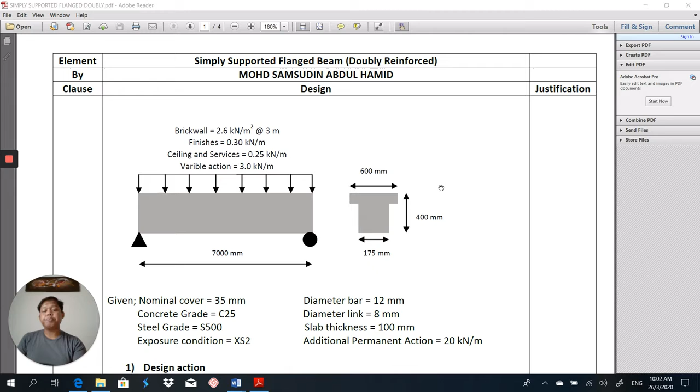So in this case, the nominal cover given here is 35 millimeter, as I said usually. The nominal cover should be calculated based on three conditions: the first one is due to fire resistance, second one due to exposure class, and then the third one due to bond requirement.

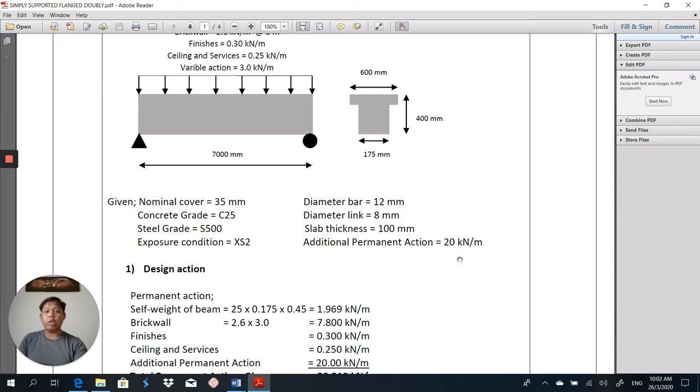So here are the given data that I'm going to use in order for me to design the beam. There is an additional permanent action here, 20 kilonewton per meter, on top of this beam, so you must not forget about this. Maybe this load is due to some external structure that is applied to this beam.

Okay, so the first step, you have to calculate the design action. As usual, you have to calculate the permanent action and also variable action. So the self-weight of the beam is 25 times 0.175 times 0.45, equal to 1.969 kilonewton per meter.

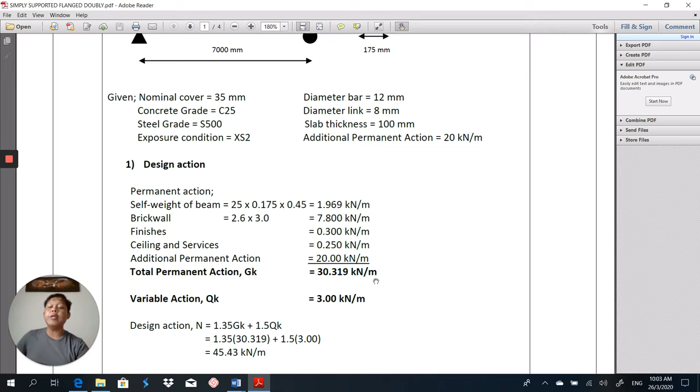Then the brick wall is 2.6 - for this time, I'm using 2.6 times 3, equal to 7.8. Then the finishes, ceiling and services additional permanent action. Therefore, the total permanent action is 30.319 kilonewton per meter, and the total variable action here is 3 kilonewton per meter. Then we get the design action here, 45.43 kilonewton per meter.

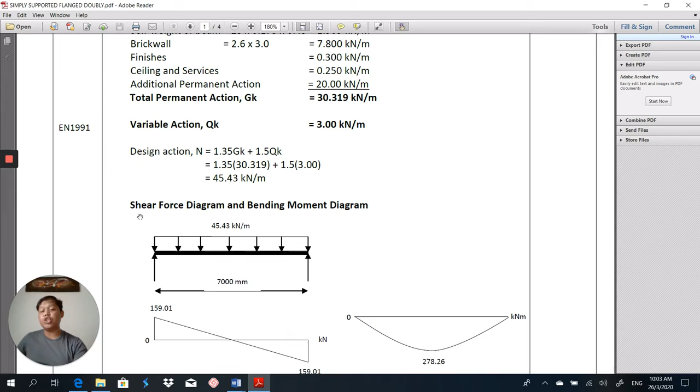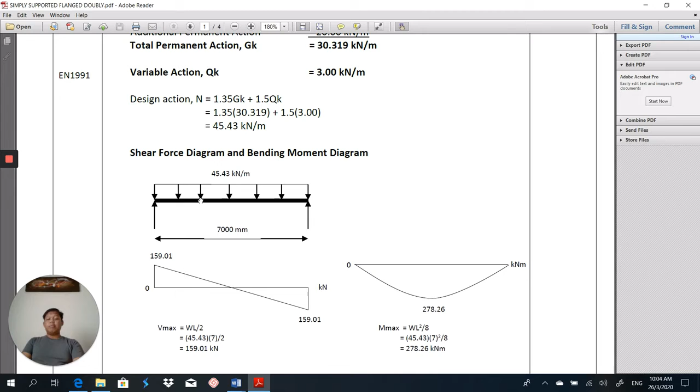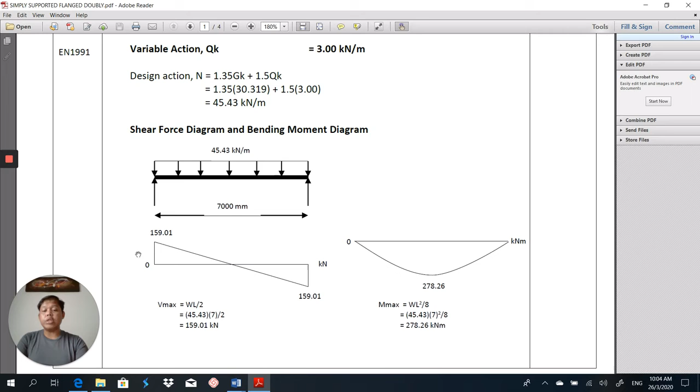As usual, after we get all this action, we have to calculate and analyze the beam to determine the shear force and bending moment. I'm using the same method because this is a simply supported beam, with length 7 meters. So the maximum shear force is equal to WL over 2, which is 159.01 kilonewton. And the maximum moment is WL squared over 8 for simply supported beam, which is 278.26 kilonewton meter. You may also use the area of this shear force to get the maximum moment here.

Okay, next we have to calculate the design reinforcement. So the first one, we have to calculate the effective depth. D is equal to H minus C nominal minus diameter of link minus diameter of bar over 2. In my case here, my H is 400, therefore my effective depth is 351 millimeter.

Next process in flange beam, you have to calculate the moment of flange. What is the moment of flange? Here is the formula - you may refer to the design appendix given. The moment of flange is equal to 0.567 FCK BEFF, HF, D minus HF over 2. Then the answer is 251.75 kilonewton meter.

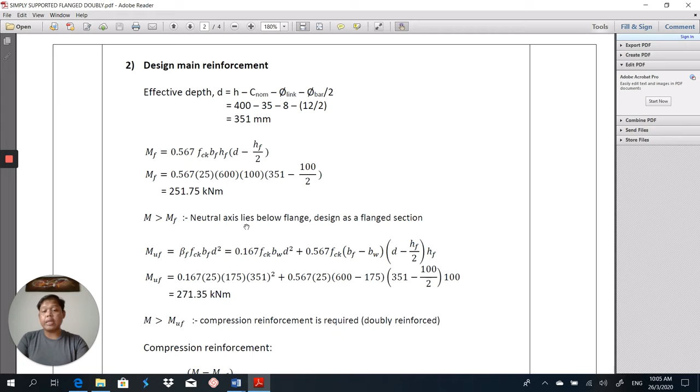So we have to compare this MF, moment of flange, with the maximum moment M. So if M is more than MF, therefore neutral axis lies below flange, designed as a flange section. If M is less than MF, neutral axis lies in flange, designed as a rectangular section. So don't confuse on that conclusion.

So next, if you would like to design as a flange section, you have to calculate the ultimate moment of flange by using beta F FCK BF D squared, using this formula. Then you get the MUF equal to 271.35 kilonewton meter.

So the purpose of calculating the ultimate moment of flange for the beam is to determine either the beam that we are going to design is singly or doubly reinforced. Compared to the rectangular beam, what we have to do is calculate K in order for us to determine either the beam is singly or doubly reinforced, either K less than K bal or K more than K bal.

But for flange beam, we have to compare the maximum moment with the ultimate moment of flange, either it is more or less. In my case here, the conclusion is the maximum moment is more than the ultimate moment of flange, which means compression reinforcement is required, therefore the beam is doubly reinforced.

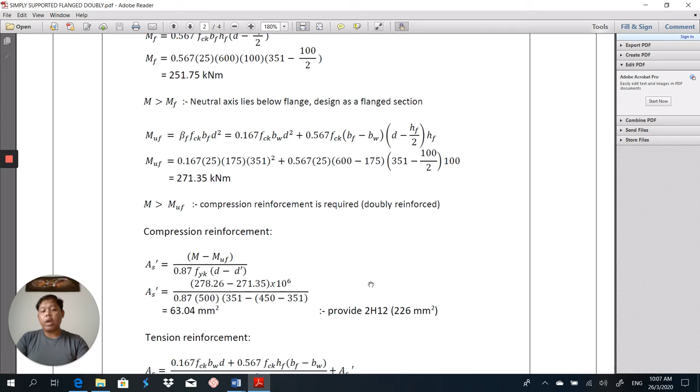And then we have to design the compression reinforcement first. So in order for us to calculate the compression reinforcement, which is the top reinforcement of the beam, this is the equation: AS prime is equal to M minus MUF over 0.87 FYK times D minus D prime. So I got the answer 63.04 millimeter squared. Provide 2H12, 226 millimeter squared, by referring to the dimension table.

Normally, if we have a doubly reinforced beam, it is a normal condition of the reinforcement. It is illogical if you get your AS prime bigger than your AS. Normally your AS prime, the compression reinforcement, is much smaller than the tension reinforcement. So you have to bear this in mind so you know that your answer is correct or wrong.

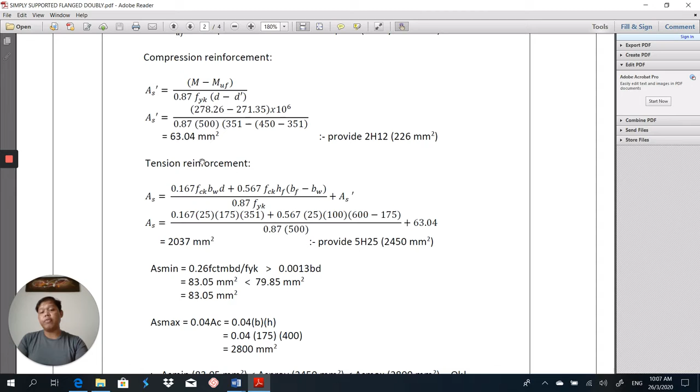And then we have to calculate the tension reinforcement here. So the tension reinforcement, by using this formula: AS equal to 0.167 FCK BWD plus 0.567 FCK HF BF minus BW over 0.87 FYK, plus AS prime.

So this AS prime is using the AS prime required here, which is 63.04. Then I got the answer 2037. Then I provide 5H25, 2450 millimeters square.

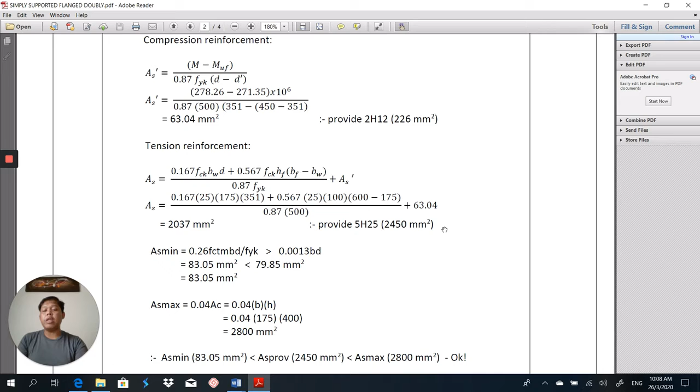As usual, we have to calculate the AS minimum and also AS maximum so we can compare with our AS provided here. We have to make sure that AS provided should be in between AS minimum and AS maximum, so be careful here.

So the B that you have to use here in AS minimum and AS maximum is not BEFF, it's actually your BW, 175 millimeters. Please be careful on that, because some of my students use the wrong value in their calculation. They use BEFF, which is 600. That is totally wrong. So the B here is BW.

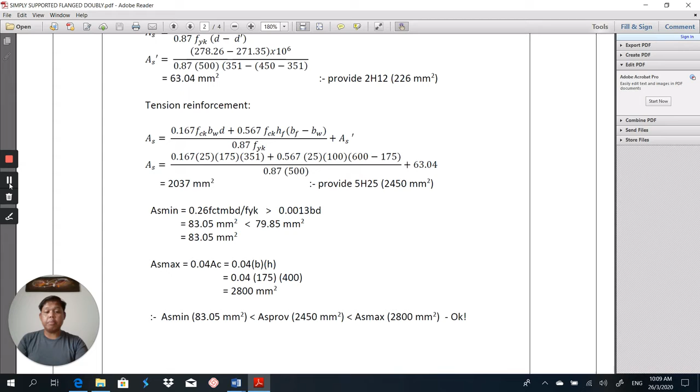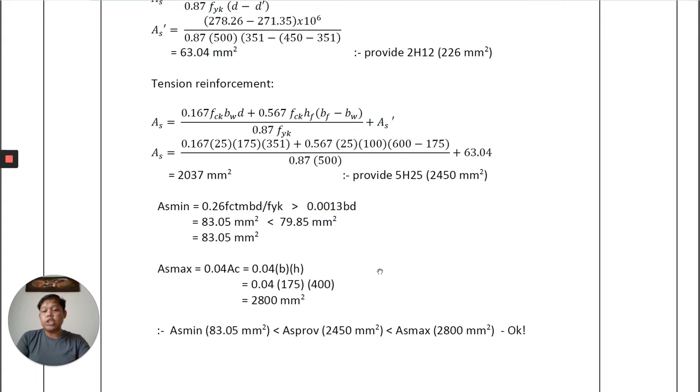So I made a conclusion here: my AS minimum is less than AS provided and less than AS maximum. Next, after we confirm the AS provided is in between AS minimum and AS maximum, the design for the main reinforcement is okay. We proceed to the next step, which is designing the shear reinforcement.

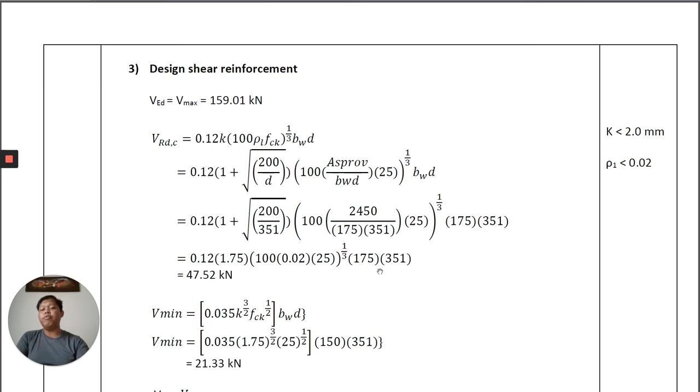So as usual for shear reinforcement, we have to compare our VED with VRDC or Vmin. First, we have to compare VRDC with Vmin. In my case here, my VRDC is bigger than Vmin, therefore I compare it with VED. Therefore, shear reinforcement is not required, therefore provide the minimum shear link.

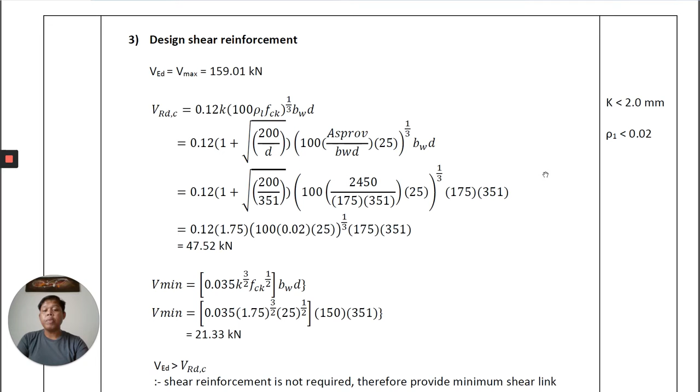So you have to make sure all the values you are using here are correct, especially the K value. You have to make sure the K value is less than 2, and the rho value here is less than 0.02. If you get more than this value, you have to use that value instead.

So what is actually shear reinforcement? The shear reinforcement is the element that we use in order to tie up the main reinforcement. Other than that, it is to cater for the shear failure of the structure. What you have to understand about this shear reinforcement is why it is not required when the maximum shear force is less than the maximum resistance shear.

This is because the maximum capacity of the shear force for the beam is actually satisfied to fulfill the requirement of the beam size. So that's why, without shear reinforcement, this beam is able to sustain the action that we apply to the structure.

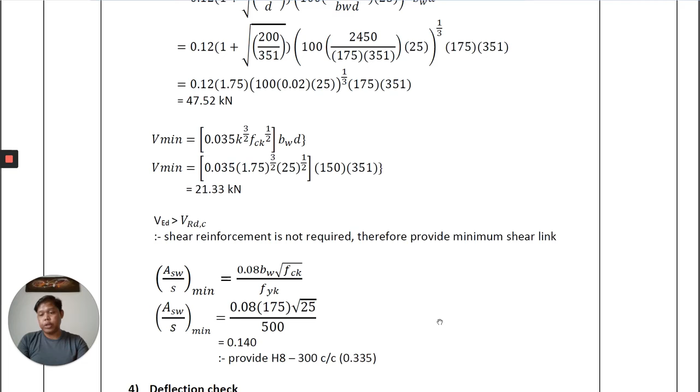So next process is the deflection. As usual, the deflection process, we have to calculate three values: L over D basic, L over D allowable, and L over D actual.

The first one, we have to calculate rho and also rho prime. In my case here, I do have a value for rho prime because this is a doubly reinforced beam and I have the AS prime value. That's why we have the rho prime value here.

So we compare the rho naught with the rho. In my case here, the rho naught is less than rho, therefore we use equation 7.16b for L over D basic.

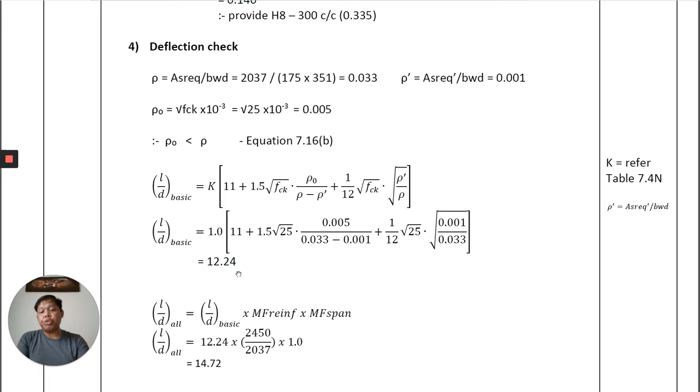So I got the answer here, 12.24 for the L over D basic, and then the L over D allowable is equal to L over D basic times the modification factor of the reinforcement.

So L over D basic is 12.24. Modification factor of the reinforcement is AS provided over AS required tension reinforcement, not compression reinforcement, times the modification factor of the span. Because this span is 7 meters, I'm using 1. If it's more than 7 meters, you have to calculate the ratio 7 over L effective of the beam. Then the L over D effective allowable is 14.72.

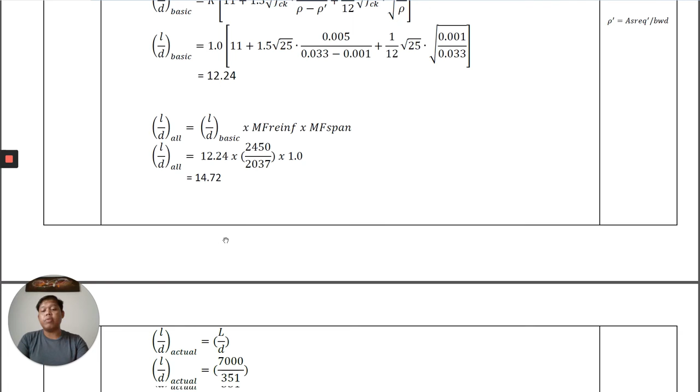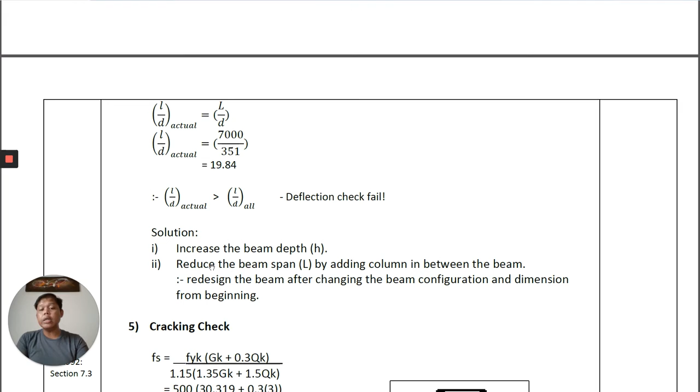So L over D actual here is L over D, which is 7,000 over D is 351, giving 19.84. Therefore, the conclusion here: the L over D actual that I found is more than the L over D allowable. Therefore, the deflection check failed.

This is not supposed to be the condition or result we get when designing a beam. So we have to make sure each parameter that we calculate in the ultimate limit state and also the serviceability limit state is passed.

So in my case here, what we have to do to make sure the deflection check doesn't fail is check which parameter contributes to the deflection. We know that one of the parameters that affects deflection is our D.

If we can increase our D here, we may reduce the L over D actual. For example, if the D becomes 400, absolutely the actual L over D ratio here will be lesser. That's why we can increase the beam depth H.

Or in this situation, if we still cannot get a passing answer, there is another solution: we may reduce the beam span L by adding a column in between the beam. You may refer to my other lecture on common beam failures on my YouTube channel.

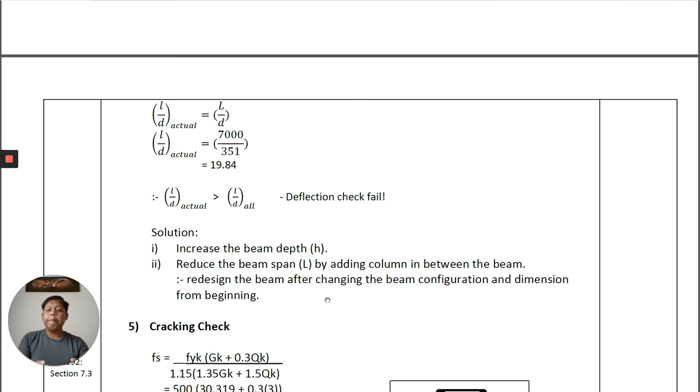So next process, we have to check the crack check. This is the detailing of the reinforcement that I'm going to have for my beam, which is 5H25. I arrange it 2 to 1, so I have two spacings here.

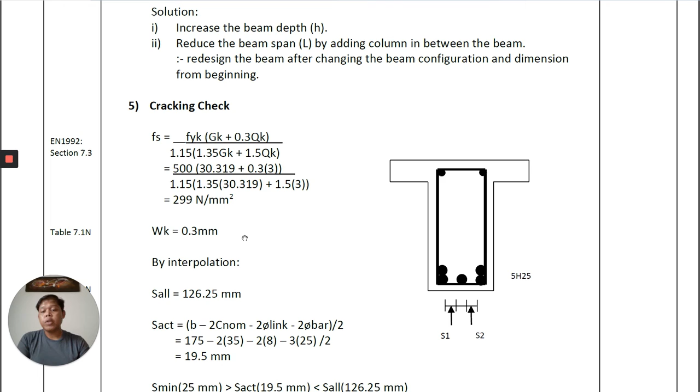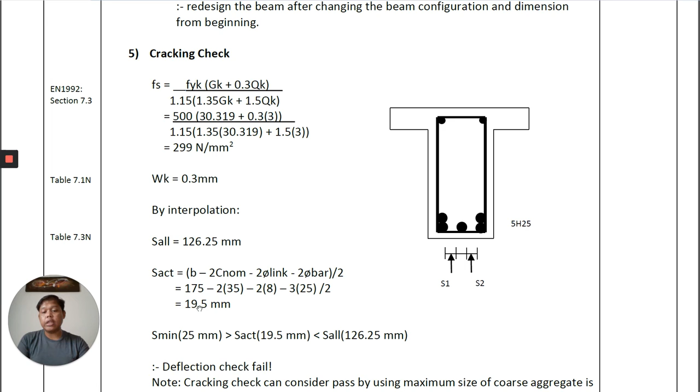As usual, the first thing we calculate is the steel stress, which is 299, and then WK is 0.3 millimeter. This depends on the exposure class used in your design. By interpolation, I got the allowable spacing as 126.25. Then the actual spacing equals B minus 2 times C nominal minus 2 diameter bar, which is supposed to be 3 diameter bar here - here is correct, here is wrong, sorry. Divided by 2 spacing, I got 19.5. So S minimum is 25 millimeter, which is more than S actual 19.5 millimeter, and less than S allowable 126.25 millimeter.

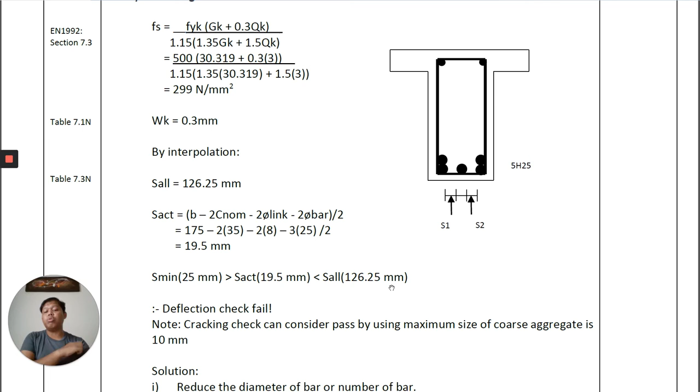So the deflection check is failed, same as what we got - oh sorry, this is the crack check, it has failed. Sorry, that was a typo.

The cracking check can be considered passed by using a maximum size of coarse aggregate of 10mm. If, for example, you assume the maximum aggregate size is 25mm, because S minimum refers to the aggregate - if the aggregate can pass through this reinforcement, it will be easy for the concrete to be compacted, so there will be no honeycomb problem.

So if you use an S minimum or aggregate size of 10mm, then your crack check can be considered passed. You have to make sure that if you order ready mix concrete, you tell them the maximum aggregate size we're going to use for this structure is 10mm. If you would like to use 20mm or 25mm, it's okay, but you have to make sure the spacing here passes, so that the crack check will be passed.

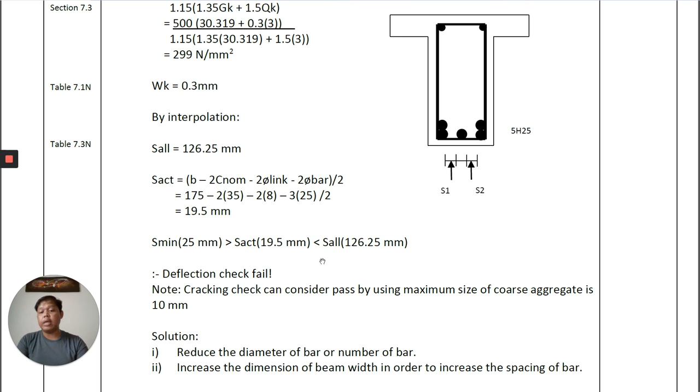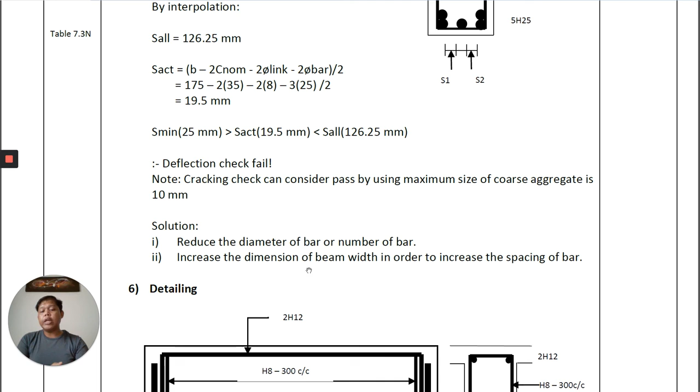What we have to do, the same solution again to make sure the cracking check passes, is to reduce the diameter of the bar or numbers of bars. We can rearrange this bar to have only one spacing - for example, we can have H30. Then you have to make sure that by increasing the diameter bar and reducing the number of bars, it should fulfill the requirement of AS minimum and AS maximum.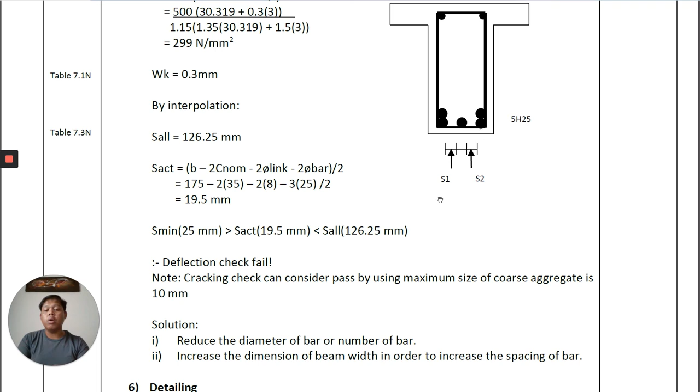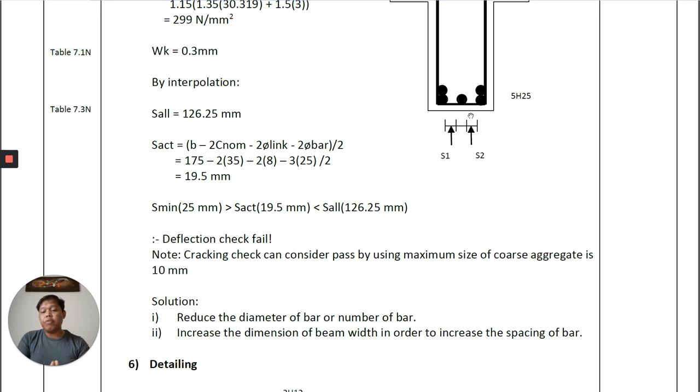It should be in between that value, and then increase the dimension of beam width BW in order to increase the spacing of the bar, if you would like to maintain the number of bars like this. So this is what we can do to solve the problem when we are facing a failure of the design based on this calculation.